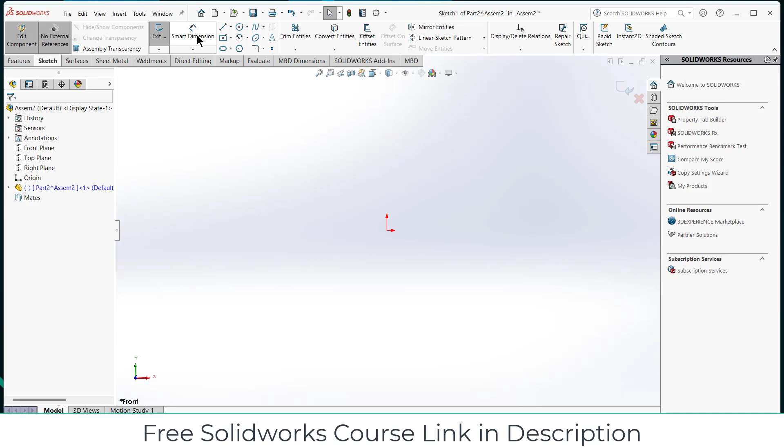Now let's start. Click on insert components, click on new part, select the front plane, press Ctrl plus 8 for normal to the view. Draw a slot as per your requirement. Give it a length as per your requirement, in my case 100 mm is fine, and give it a radius as per your requirement, 5 is fine for me.

Select these 2 points and give it a distance. Escape, select this point and this point, make it vertical.

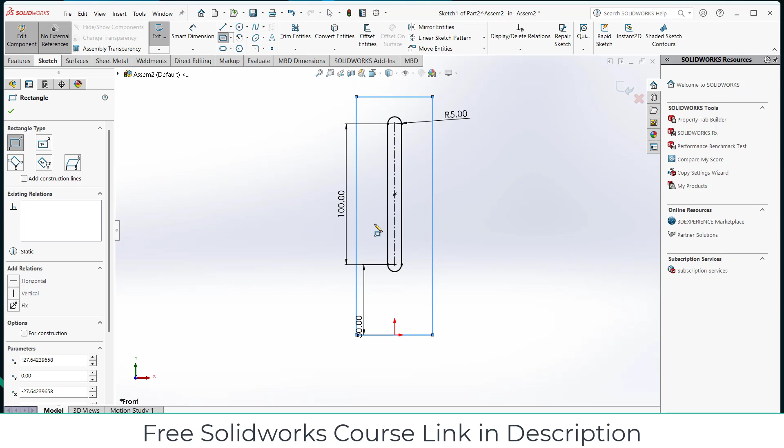Now I am going to use corner rectangle and draw a rectangle here. After that, let's give it some height and width. Height will be 170 mm, width will be 55 mm, it will be 55 divided by 2.

Select this point and this one. Click on make midpoint, press Ctrl Z, coincident.

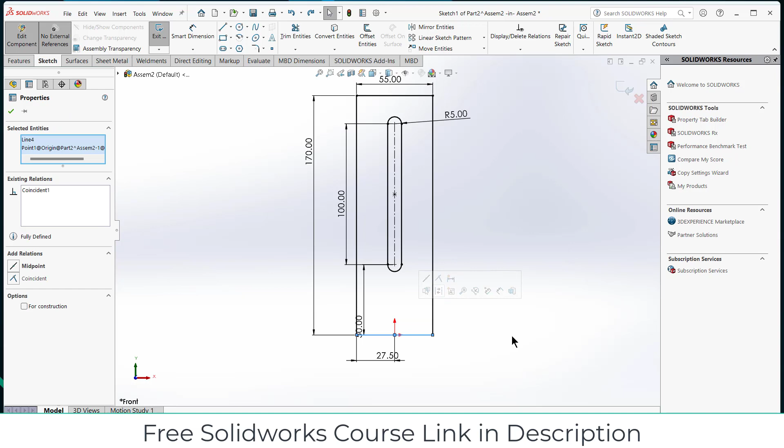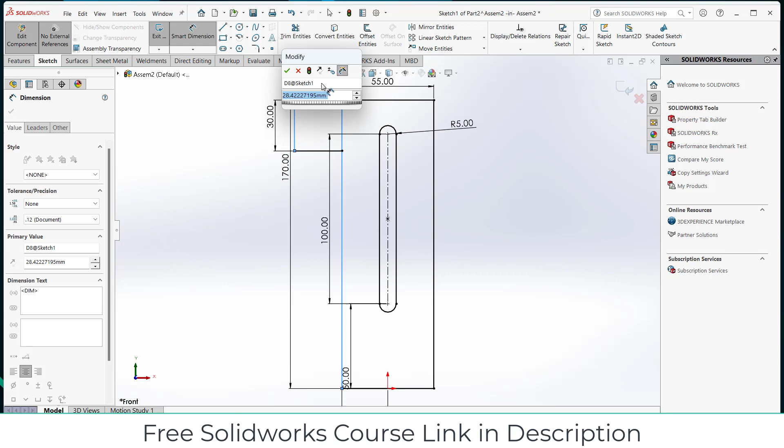Now I will draw a rectangle here. Give it 30 mm and 30 mm. Click on mirror entities.

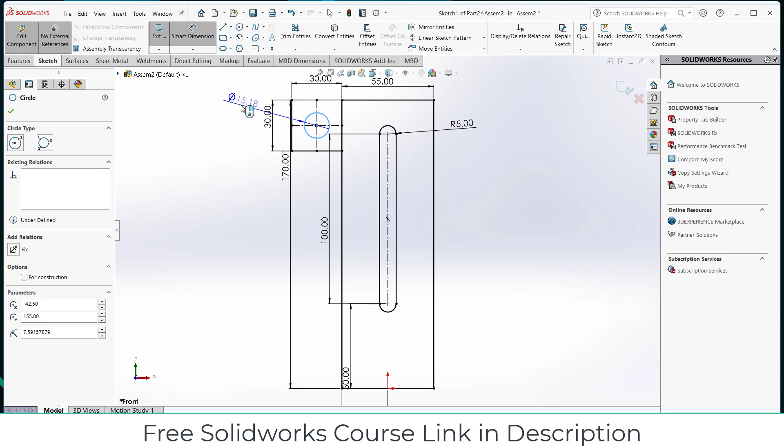Before I do mirror entities, let's draw a circle here inside of it. Give it a diameter as per your requirement, in my case 15 mm is fine.

Click on mirror entities. Select the entities that you want to be mirrored. In my case this is a rectangle and I want to mirror about this line. Mirror about... for some reason it is not picking it up.

So what I can do is draw a center line, this is a custom center line. Click on mirror entities, mirror about this line. See, it's working.

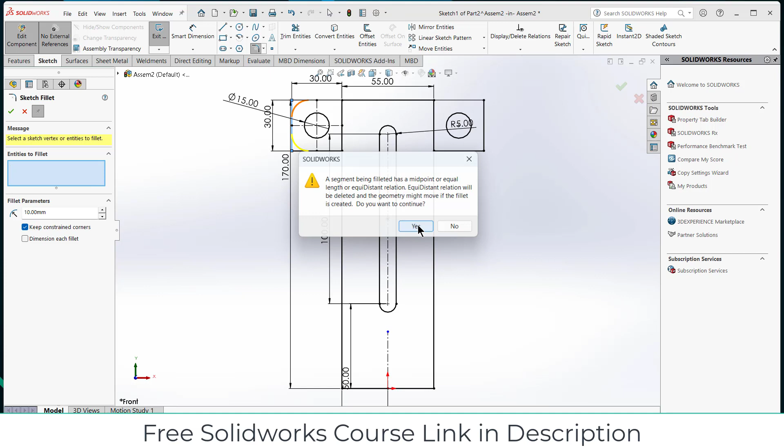After that, click on fillet. I should have added the fillet earlier, but sometimes my brain works a little bit late. Click OK. Go to the features, click on extrude and select the faces.

Notice one thing, that it is not at the center of it. The reason is that after my fillet, the center of the line is moved here. So that is the reason I got the issue. So how should I resolve it?

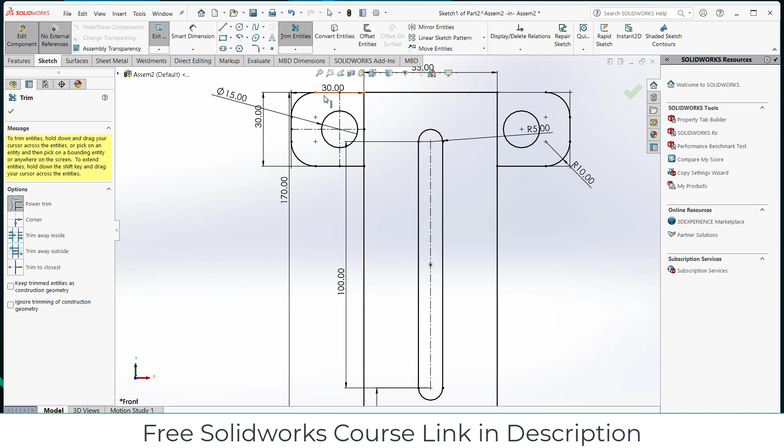First let's delete this line and delete the circle as well. Simply draw, you can see the point, so simply draw the circle here. Give it 15 mm.

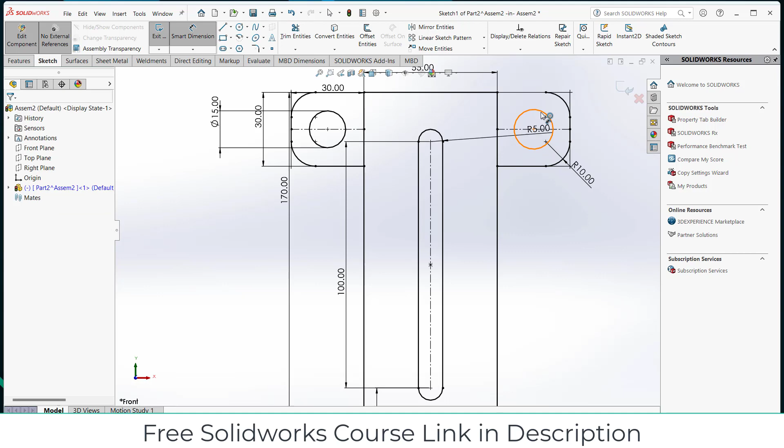Sometimes these kind of mistakes are done. Draw the center line like this. Select this, delete, draw a circle here, 15 mm.

Also draw a circle here. Give it a radius as per your requirement, in my case 10 mm is fine. And the distance from here to here is 5 mm... no, 6 mm is fine.

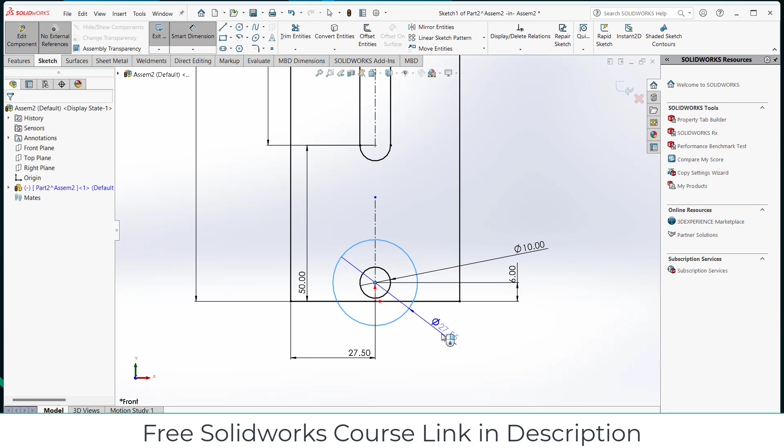And let's make it bigger, 30 mm. Go to the features, click on extrude. Extrude the area as I'm showing. 10 mm is fine, I guess. Yep, 10 mm is fine.

After that, what I will do is click on here. First, exit the assembly component mode. Click on design library, sorry, click on toolbox. Click on edit now.

Now click on ANSI Metric. Click on power transmission, click on gears. Select this spur gear if you want, or you can make a custom one as per your requirement.

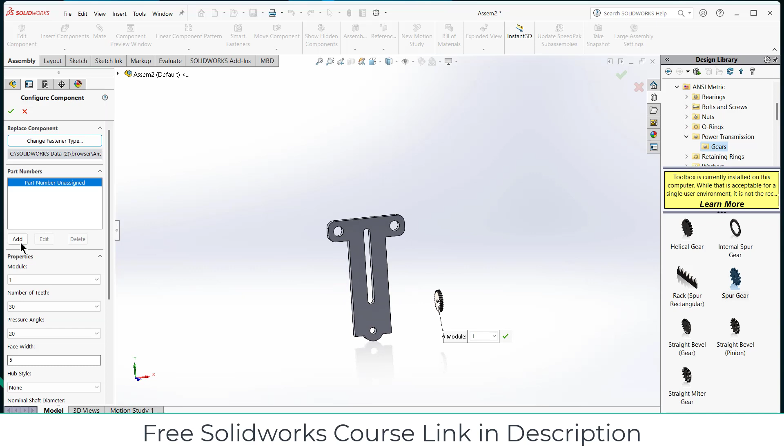So increase the number of teeth, let's say 30 - it is quite small. 60 - also small. 80 - a little bit okay, but not that. It is fine, I guess.

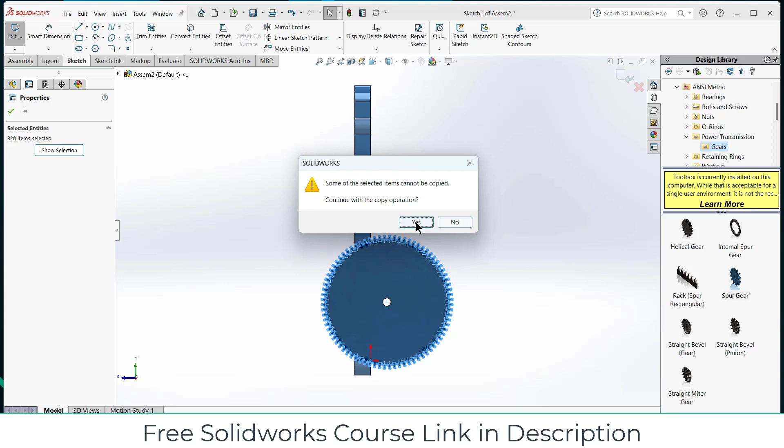So before I move forward, click OK. I'm not going to use this gear, I'm just simply going to copy the sketch. Select this, click on sketch, select this, and click on convert entities. After that, press Ctrl A, Ctrl A, and Ctrl C to copy the sketch, and exit the sketch mode.

A question comes in your mind: why am I not using this gear? Okay, so I have to modify the gear a bit. If I use this gear directly and try to do modification, my whole library will be ruined. So I'm not going to use that.

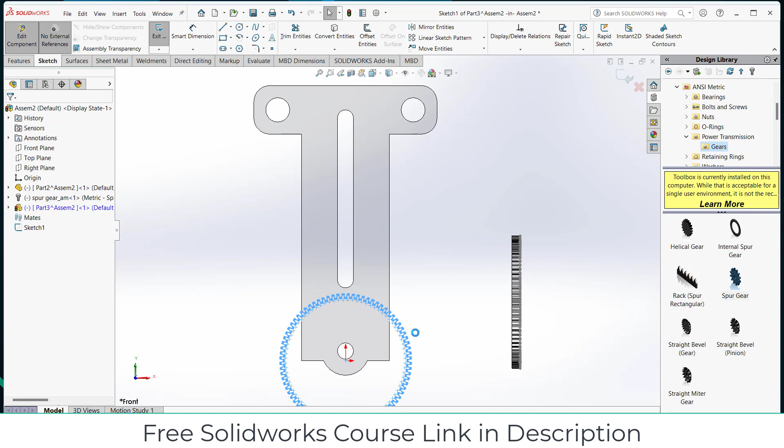Now I'm going to paste the sketch by pressing Ctrl V. Make sure that you don't try to do any changes at this moment. Extrude it, click OK. Now you can do it. So while in sketch mode, basically pasting the sketch, never try to edit the sketch, it will mess up the whole thing.

Click on extrude cut through all. Click OK. Exit the assembly component mode.

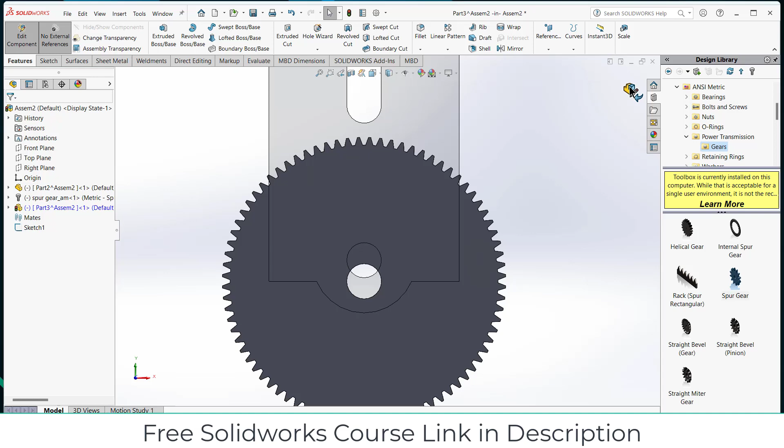Now what you have to do, let's see. Select this gear and this thing, mate. Select this one and this face, mate. Now select this gear, click on edit component. Select this face, press Ctrl plus 8.

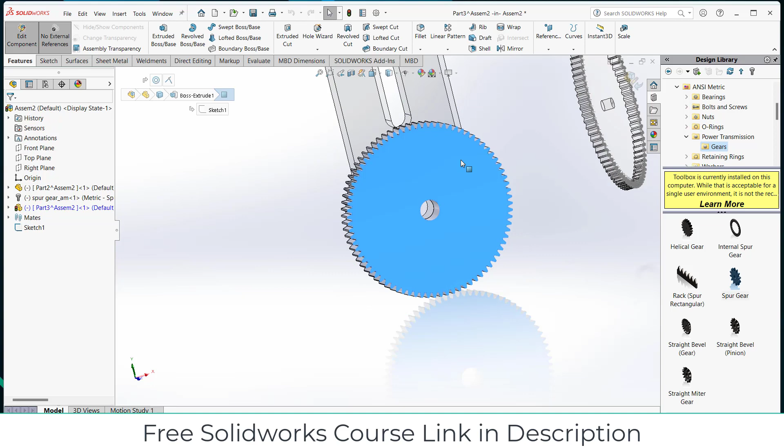Click OK. Click on extrude cut. Click on through all. Click OK. So exit it.

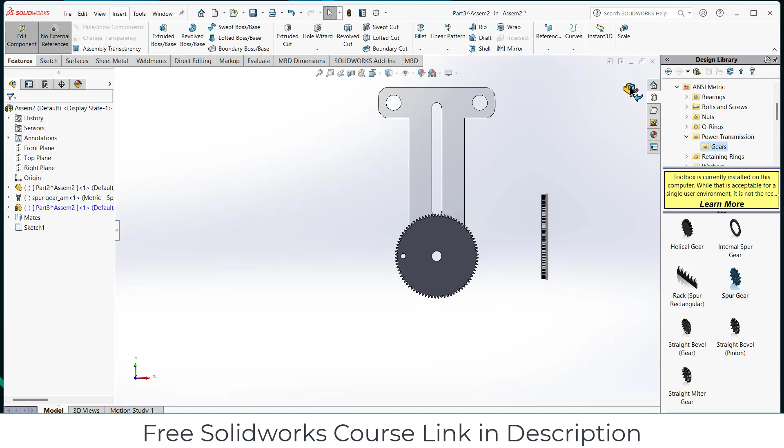One more thing I have to do is I have to fix this part. So how can I do that? So I will select the right plane of the part, click on mate, and right plane of the assembly, click OK. After that,

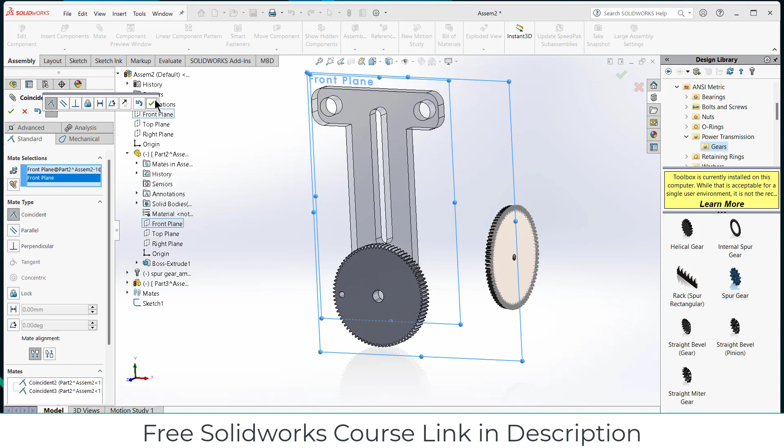I will select the top plane of the part and the top plane of the assembly, click on that, and front plane of the part and the front plane of the assembly, click on that. So now this part is fixed, cannot be moved or rotated, and this is basically what I want. But this gear can only rotate.

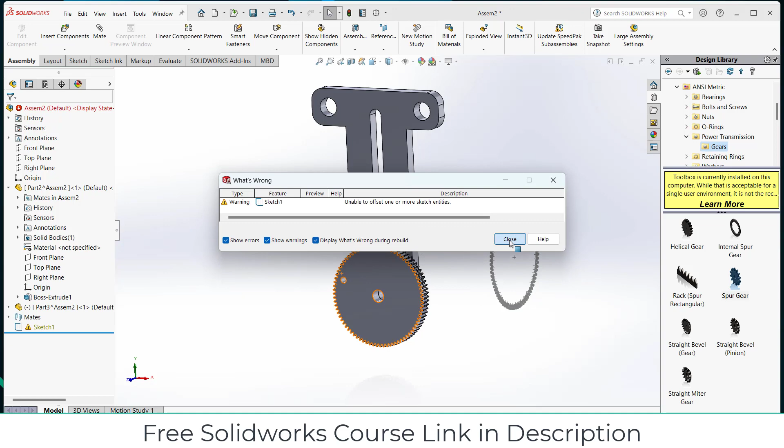Okay. One more thing that I will do is let's delete this gear because I'm not going to use it. Also delete the sketch. As you can see, it creates some error. Now what I'm going to use is bevel gears. So simply drag and drop.

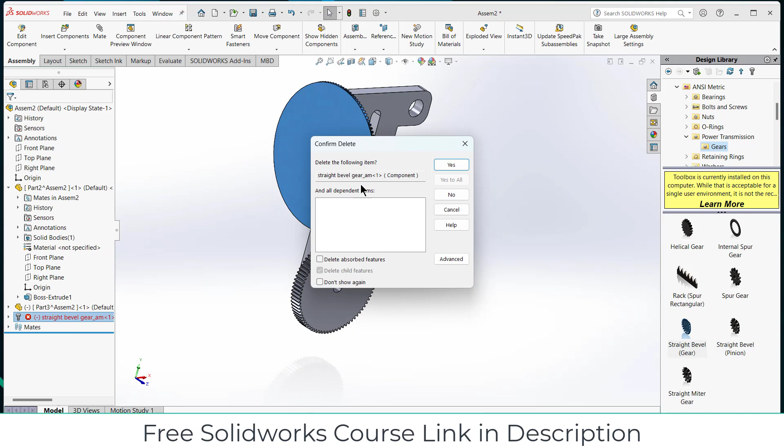Looks like I messed up my gears library. As you can see, the modification option doesn't come up. Let's see if I can do something. Oh yeah, it's working. So let's make it 1. And how many teeth do I want? I think 20 will be fine.

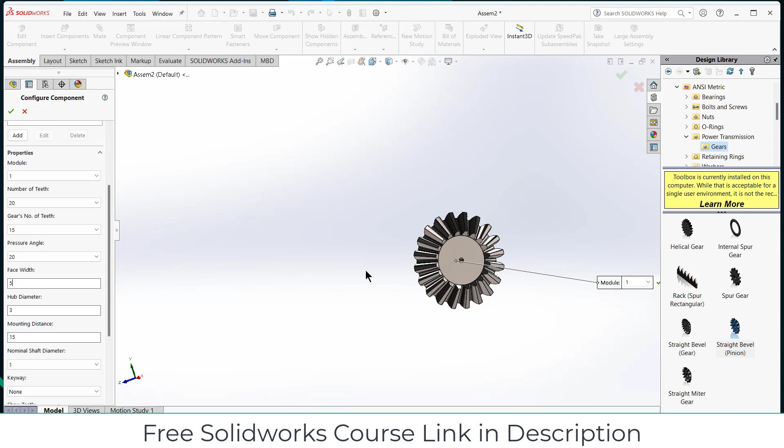The tooth thickness is quite small. So face width, let's increase to 5. Looks okay to me. And diameter to 15 mm. Evaluate, measure. So 15 mm. Okay, it should be just 1, not 1.25 or anything else.

My bad. I'm not able to fully edit it. So delete it. So drag the bevel gear. So module should be 1, number of teeth will be 20, and the mounting distance will be 30. You see this distance, and if you go upward you can see the number of teeth and here the number of teeth. Make sure they are both 20 so that it will be easier for me to mate because both have the same number of teeth.

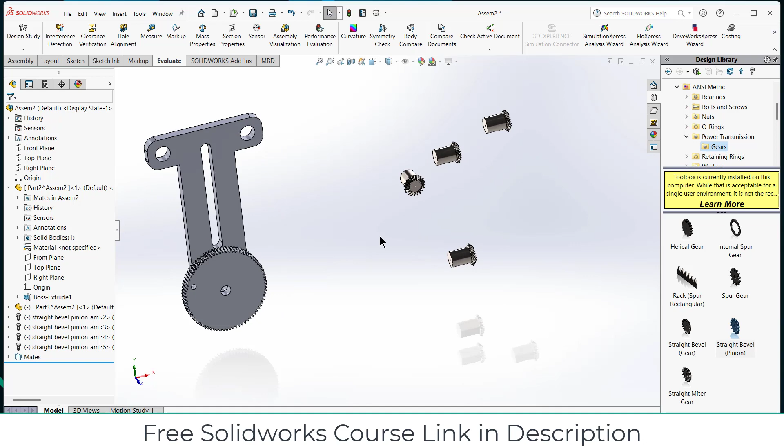So this one here I can use again and again. So click OK. 1, 2, 3. That's all. Click close. Now what I will do, I will go to the assembly, click on mates, select this face and this face, select this face and this face.

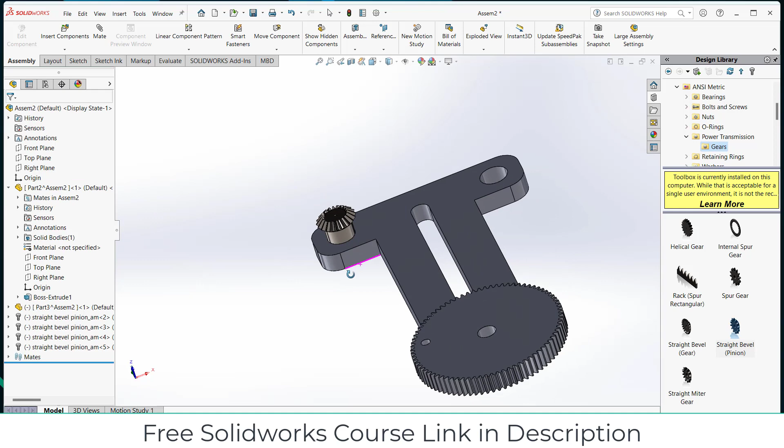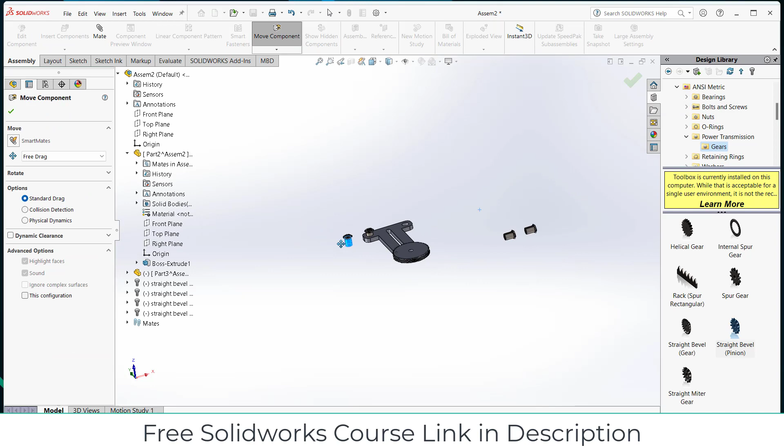Now I need something to support this, so what I can do, I will create a new part. So let's see how I approach this thing. Before I do that, let's grab this part. It's not fixed, right? Click on move components, move it here, zoom in, click OK, select this thing and click on show, click on mate,

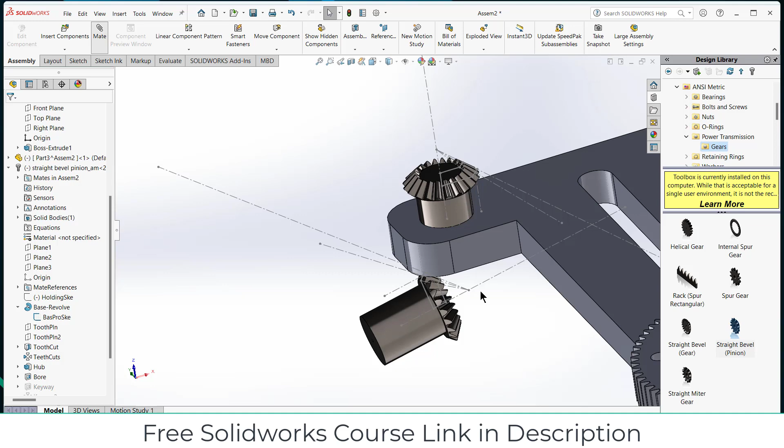select this point. Before I do anything, just rotate it so that they don't combine with each other. Sometimes it's an issue. So select this point and this point, click OK, select this line and this line, click on 90-degree angle, click OK and rotate a bit. Looks good to me.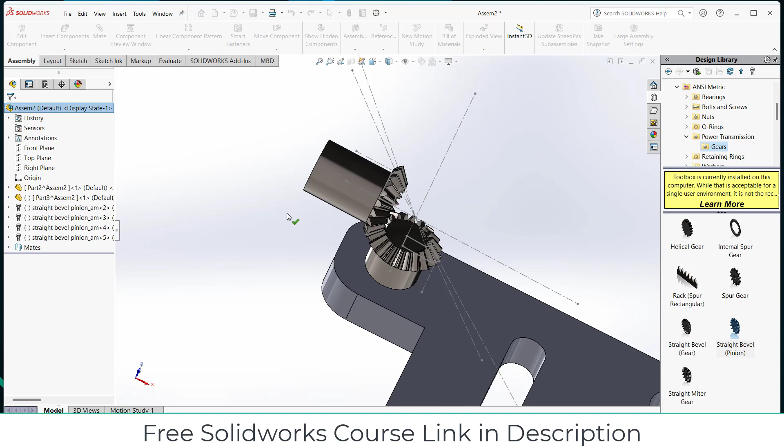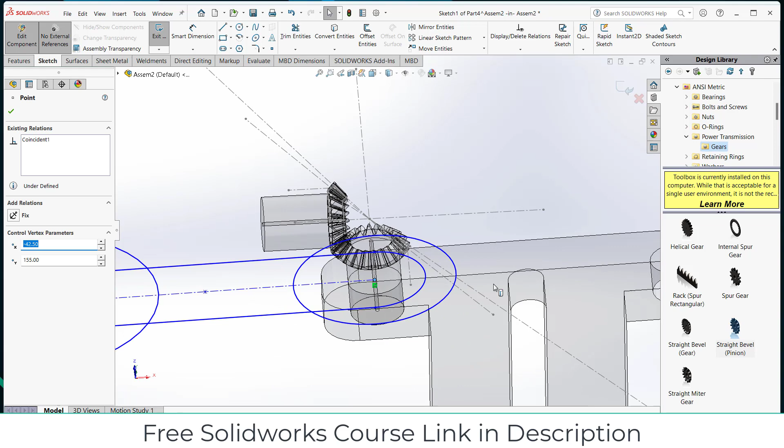Now what I will do, I will create my new part. So what should I do? I will click on insert components, click on new part, and I will select this face. Press Ctrl plus 8 for normal view. Make it big because we can make it correct. Press escape. Okay, where did this point come from? I have no idea. Just merge with this and press Ctrl plus 8 and

what should be the diameter? It will be 15 mm. Okay, press Ctrl Z. Before giving the diameter, let's just define the length. So 100 mm is fine, I guess. 15 mm, 15 mm, 15 mm. Just to know that this 15 mm is diameter. This 15 mm is radius, so it means its diameter is 30 mm.

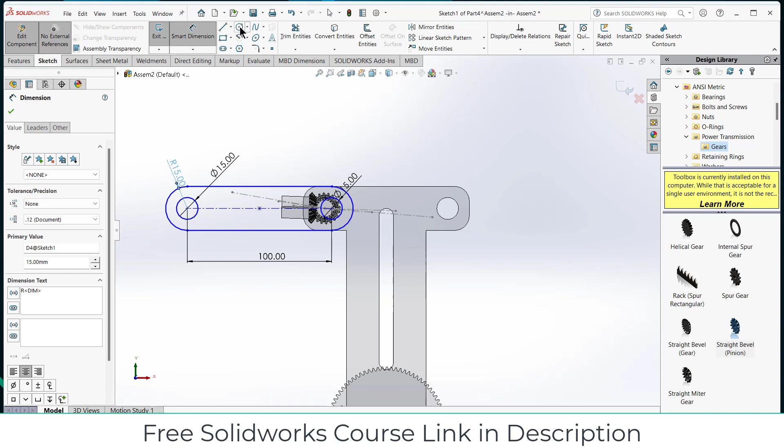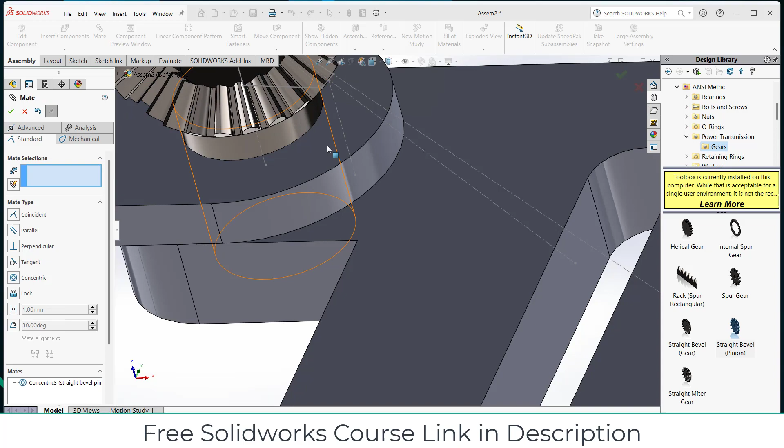One more thing that I need to add is a hole, and give it 10 mm. Extrude how much? 10 mm is fine, I guess. Or make it 5 mm. Click OK. Exit the assembly component mode. Click on Mate. Select this face and this face. Click OK. Select this face and this face. Click OK.

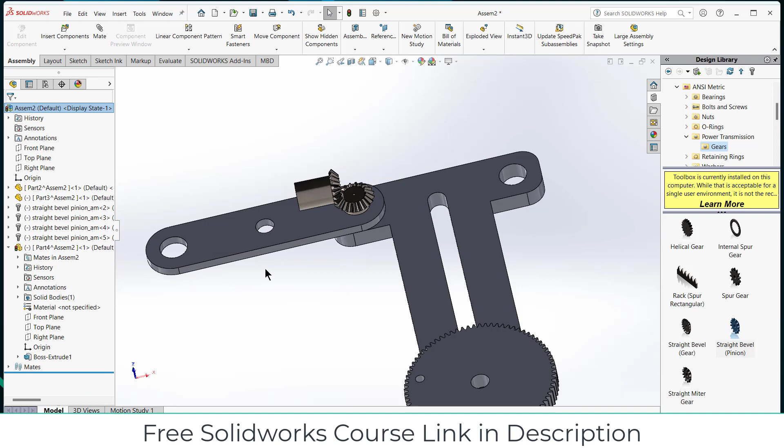Select the part. Select the gears first. I just want to hide this, profile view, gear view. Now it's good. Select this one. Click on Edit Components. Click on Right Plane. Click on Sketch. So I want to make something that supports this gear. So first exit the sketch mode. First exit this mode.

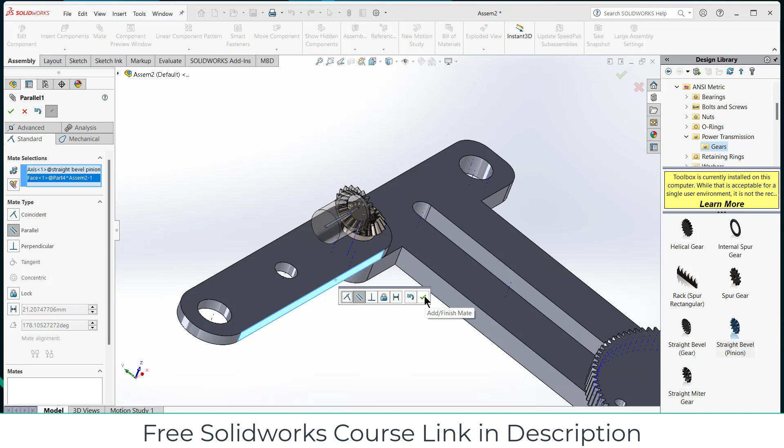There is an issue that I found. So click on view temporary axis. Select this line and this face. Make sure it's parallel. It's a very important thing, else you will face a lot of issues. Click OK. Just to know that I am going to delete these or suppress these.

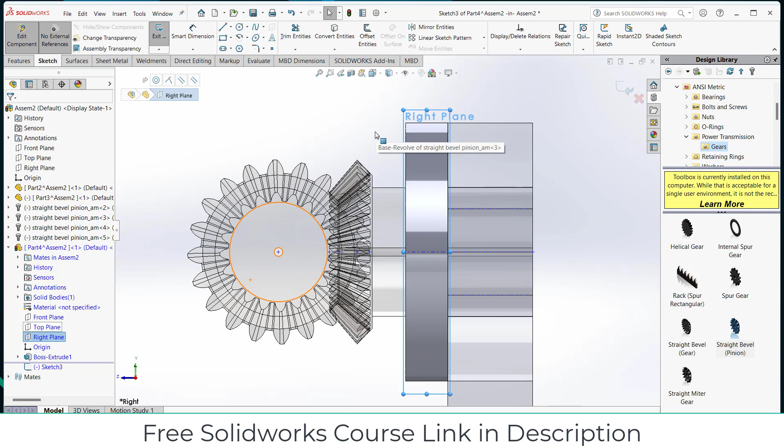Parallel. OK. Now I will select this part, click edit components, and let's see which one. Right plane. Okay. Rectangle I think is best for me. So it will be 30 mm.

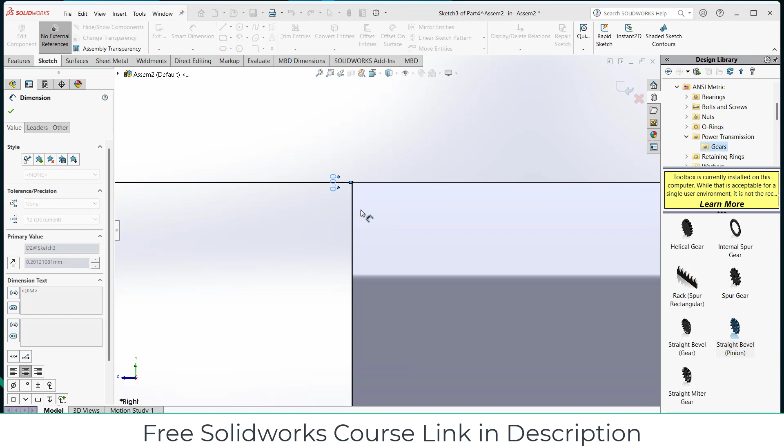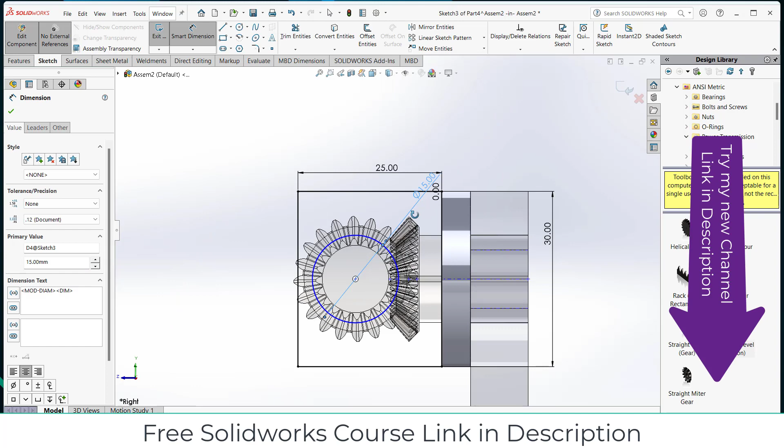0 mm. 25 mm. And make sure no external references is checked on, else you will face a lot of issues. And I saw many guys complaining, hey, it's working on your PC but not in mine. So this is the issue. Okay, and I think that's okay.

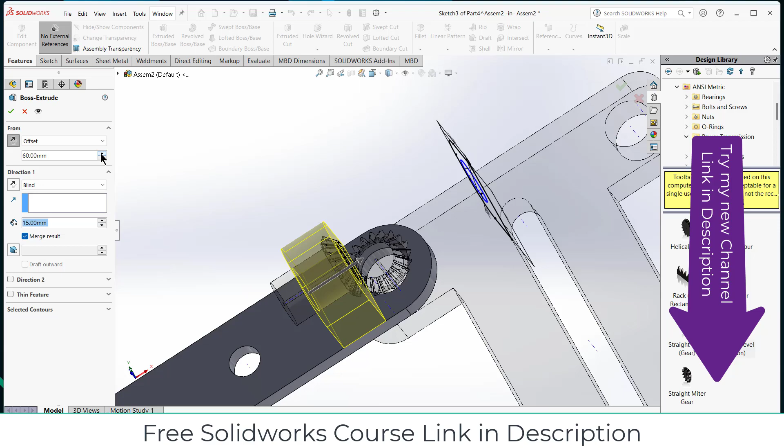After that, let's add a fillet. Click OK. Now click on extrude. Click on offset. Increase the distance and click on reverse direction. Increase the distance and increase the thickness and distance. Click OK and exit the assembly component mode. Select this face, press Ctrl plus 8. Click on here.

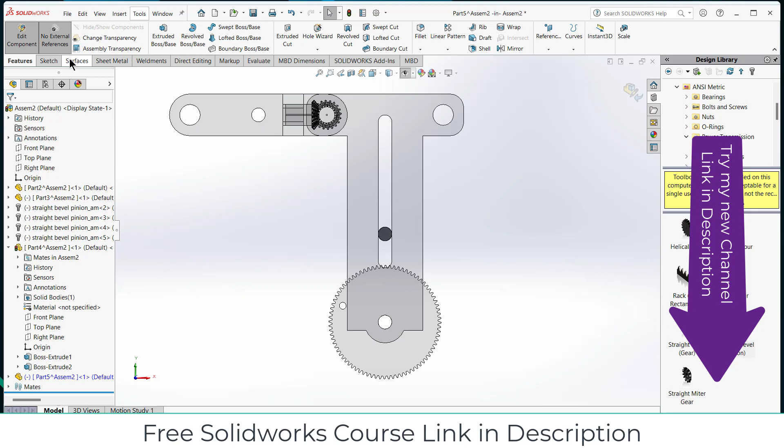Now I will create a new part. Select this face and 5 mm. Let's make it 12 mm. Select this face, sketch, center rectangle. Horizontal line.

95. 95 divided by 2. 15. 15 divided by 2. 5. 40 mm.

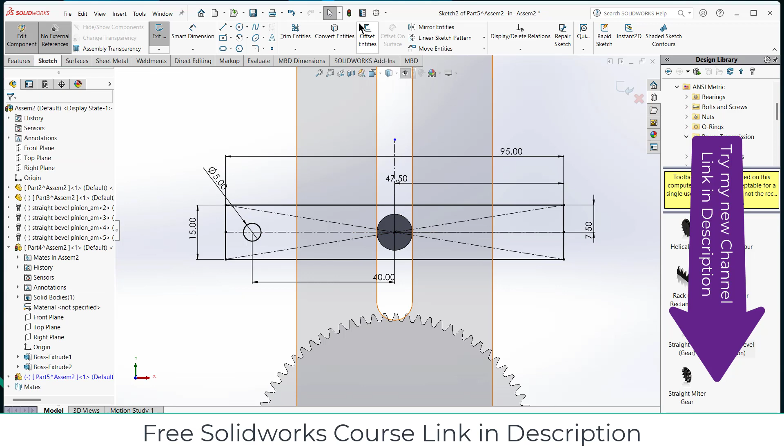I seriously have no idea about these dimensions. I'm just throwing an arrow in the dark. This is what I basically am doing right now. Literally have no clue whether I'm right or not.

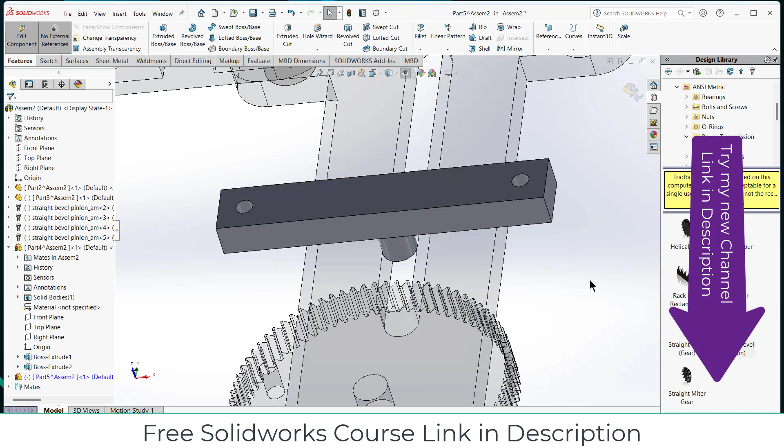Seriously. 10 mm. Click OK. Select this one. Click on face. 5 mm. Extrude cut.

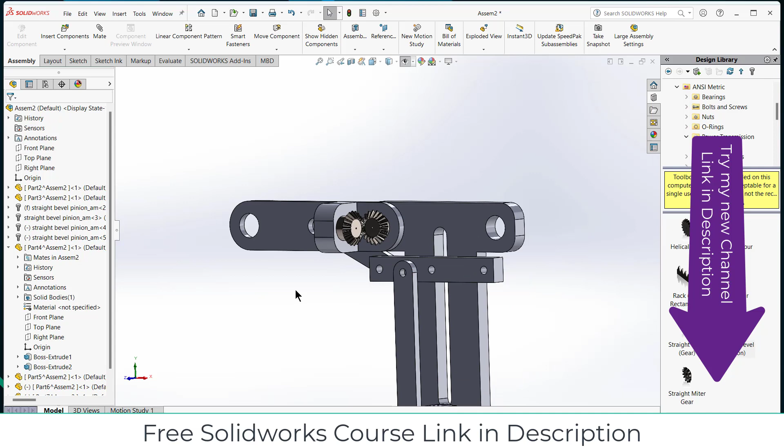You see that my gears have the same gear ratio, so I don't need to change anything. Click OK. There might be chances that they rotate in opposite directions. That's the only thing that I need to take care of. For some reason the mechanism is fixed. Okay, why is the mechanism fixed?

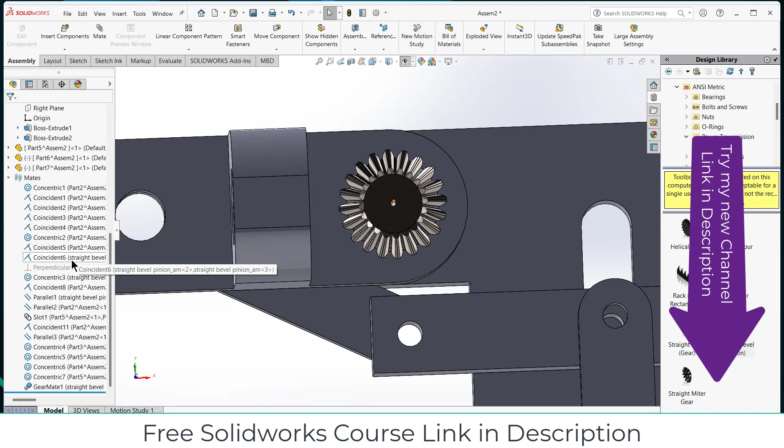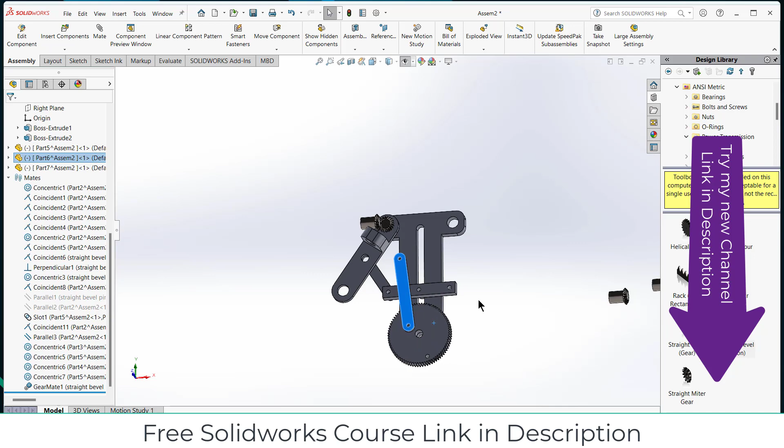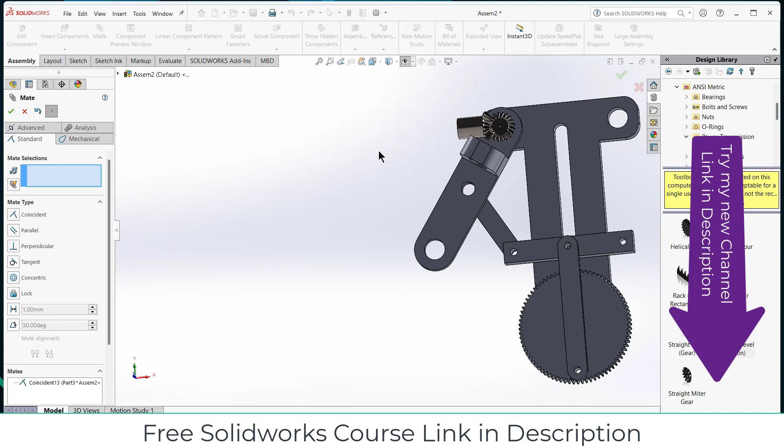Remember that I have made some mates and I said they are for temporary purposes. Now it's time to remove them. Suppress this one, suppress this one, and this one. Now it's working, I guess. It's like this face and this face. Oh, and I forgot one more thing. Let's go back to the top view.

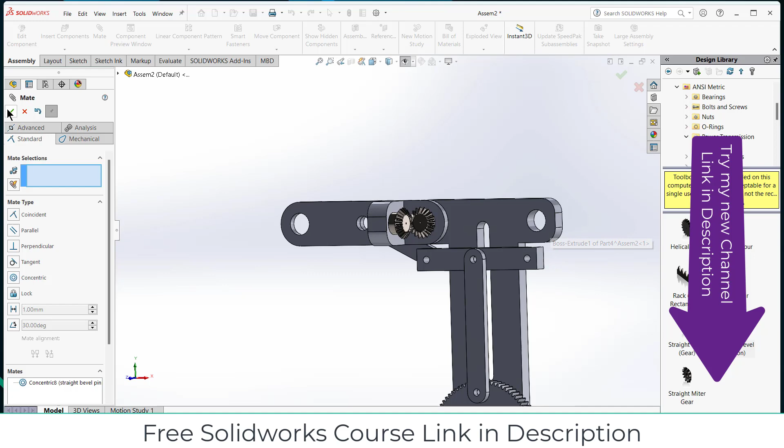About these gears, I don't think I need them. I simply delete them. A question is why. You see that I can use something called mirror mates or mirror pattern, I guess, mirror components. So this

Really sorry if you are hearing any dog noises. Can't do anything about that. I am bored.

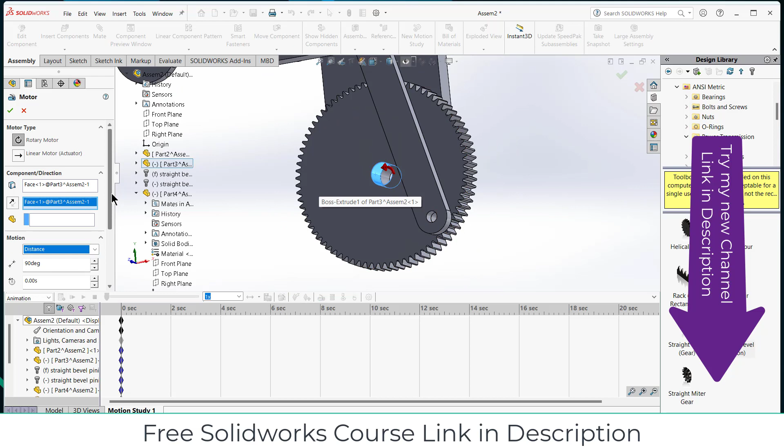Click OK. Is it working? Looks like it. Let's try to do animation. Let's click on distance. 720, 0 to 10 seconds. Click OK. Let's increase the FPS to 30 for better quality. Let's move this to 10 seconds.

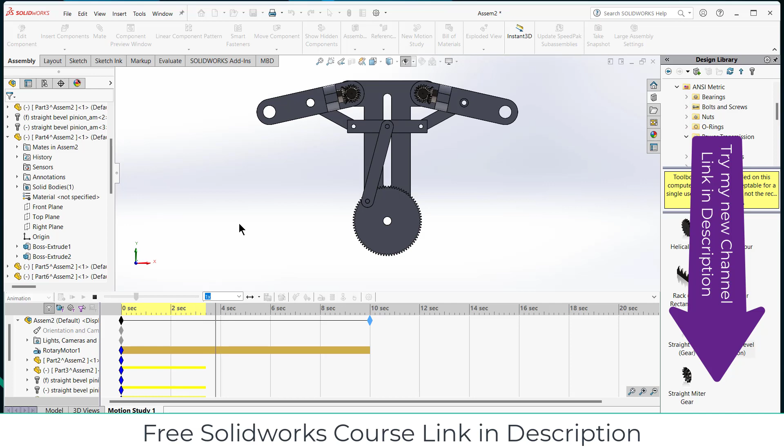Now let's disable this thing. Select this face, press Ctrl plus 8. Click on calculate. It is calculating, so it will take a little bit more time. Notice it is working right now. It's quite fine. Okay, so let's click on play.

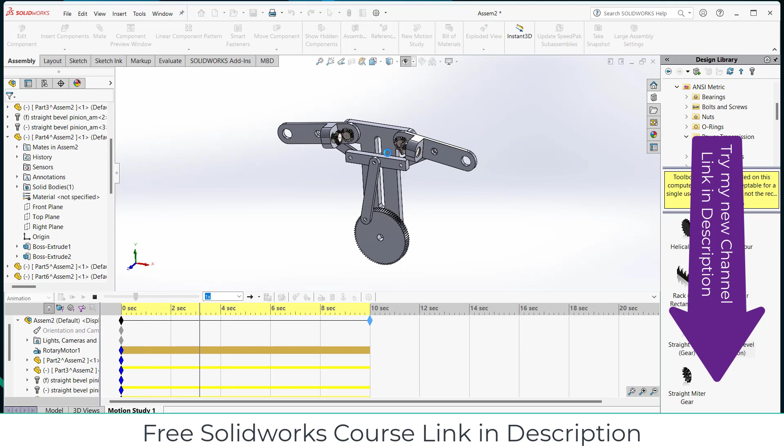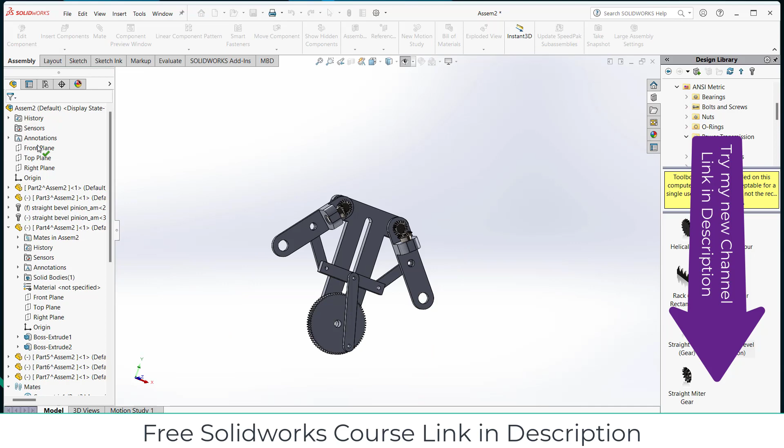Let's try to add some wings here, right? Without wings, it looks like a piracy version. So how should I add wings or make some wings? Let's see, think about it and make it. So click on new part, select the front plane, press Ctrl plus 8 for normal to the view. So I know that these diameters are 15 mm. Okay, so I will zoom in, make something of 15 mm diameter,

extrude. How much? I think 15 mm is fine for me right now. After that, one more thing that I forgot to do. Right click, edit components, make sure it is on mid plane so that when I use something called the mirror command, I will face no issues. And what thing is left? Select this face, click on sketch,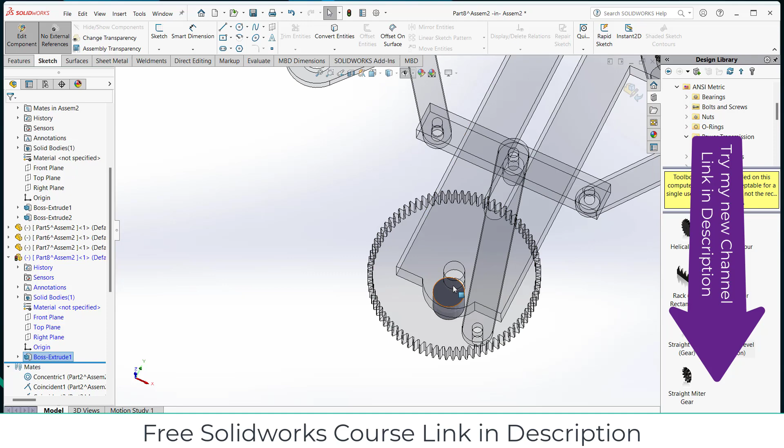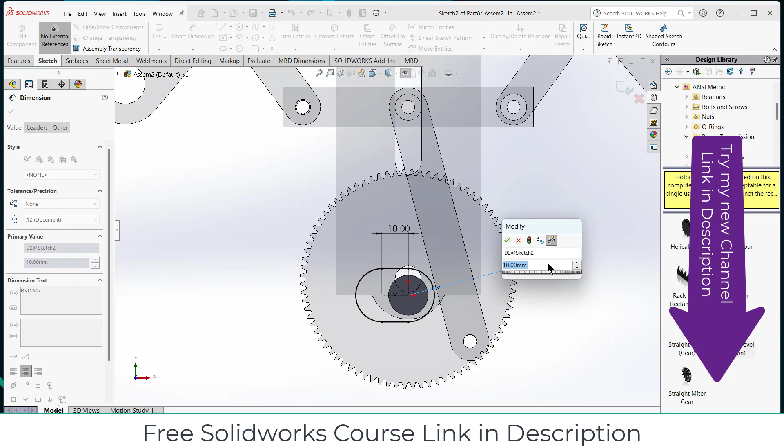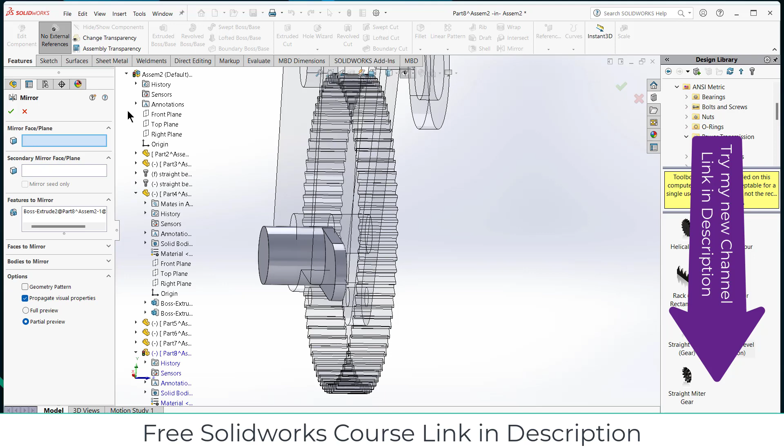and make it 10 mm. By pressing Ctrl, select this point, make it coincident. 7.5, and this one will be 15. Extrude 3 mm is fine for me. Now mirror about this plane, click OK, and I will select this sketch.

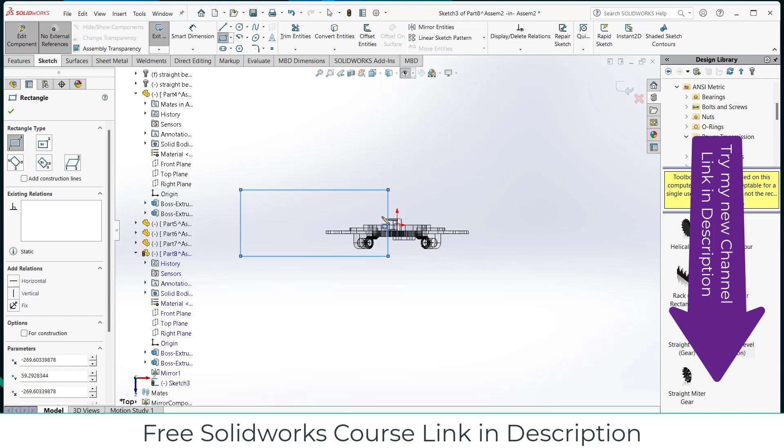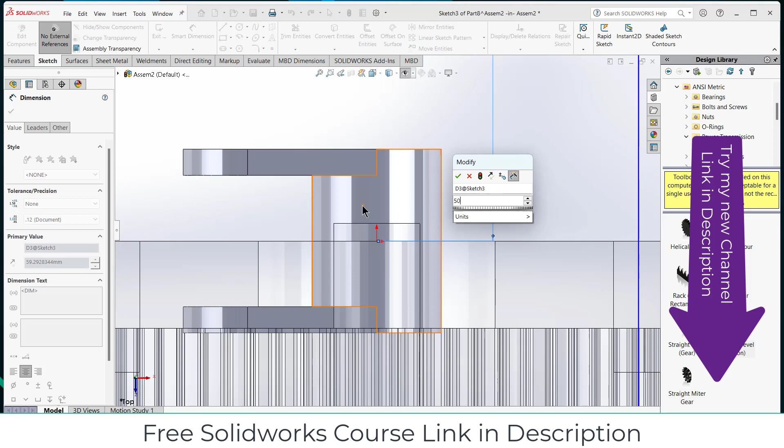I will simply draw a rectangle, nothing too crazy I guess. So make it big as per your requirement. 300 mm is fine for me, and I think this one should be 100 mm, and 50 mm is fine for this thing. Click OK and move it forward. Select this line, by pressing Ctrl select this line, make it collinear.

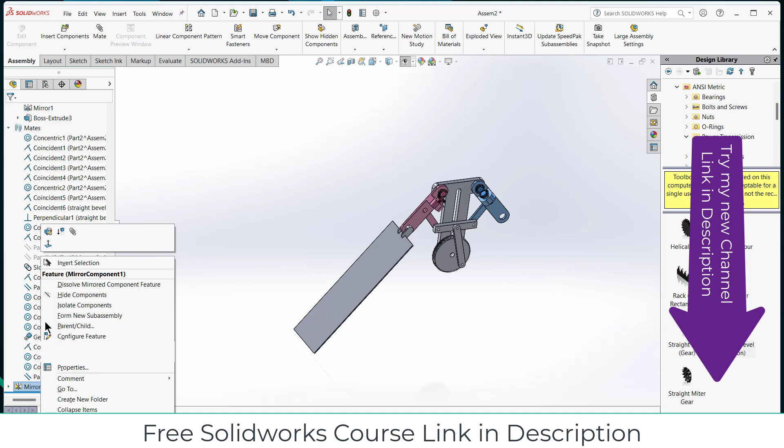Let's click on mid plane. Let's make it 2 mm. Exit this. Mate. Select this face and this face. Click OK. Select this face and this face. Make it parallel. Now to move it on this side, I will simply use the mirror component. So right click on it, click on edit. Just add one more component. This one. Click OK. So let's see in 3D view.

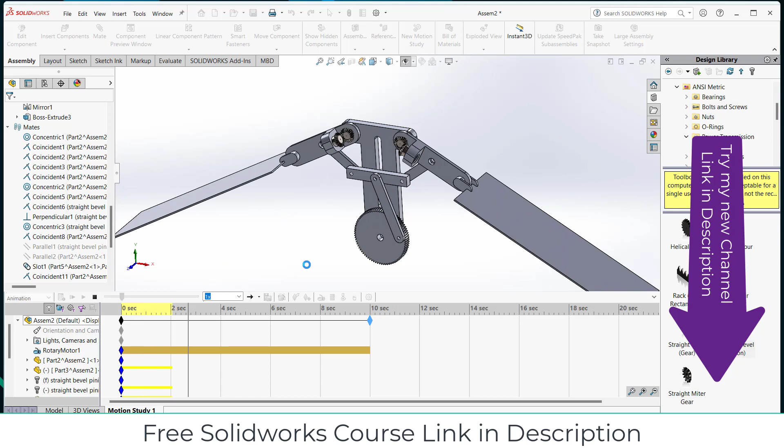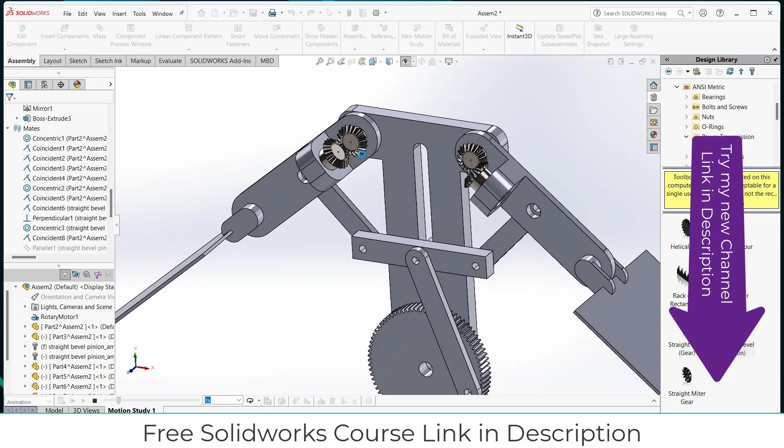Let's click on animate. It's going to take some time because it's quite a heavy thing. So let's see the animation. So if I click on play, looks good to me. Let's make it playback loop mode. For example, if I zoom in, you can see the gears are also meshing. Okay, so there are not many issues.

So I hope you guys learned something from this video.